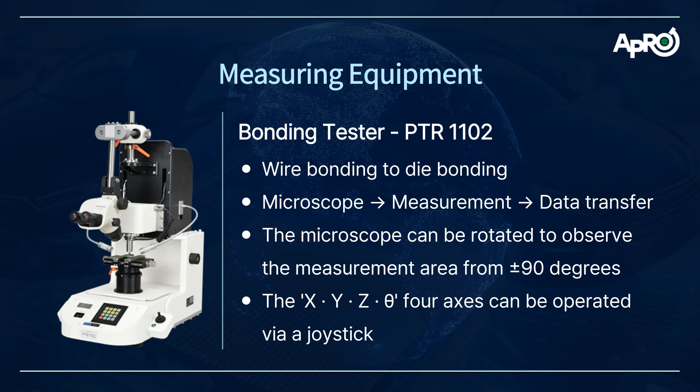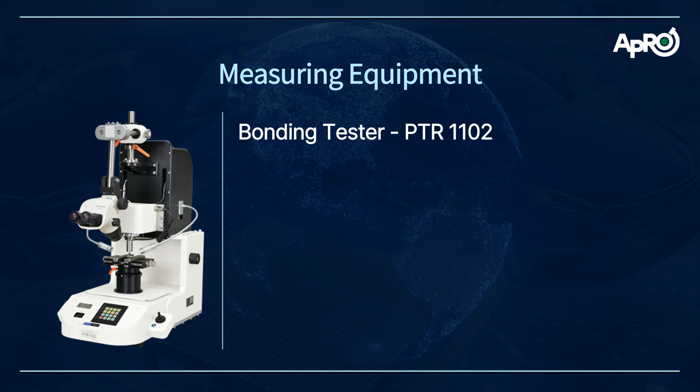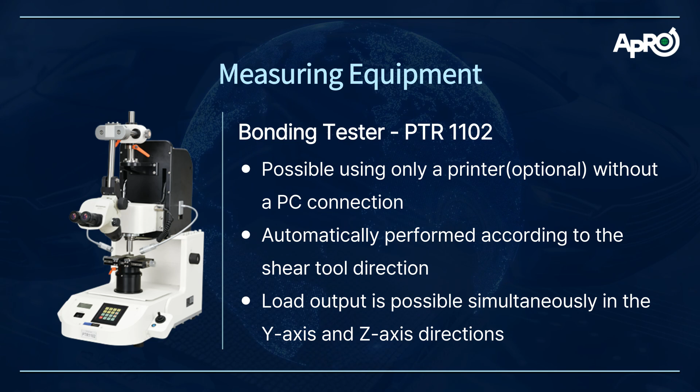The microscope can be rotated to observe the measurement area from plus or minus 90 degrees. The XYZ theta 4 axes can be operated via a joystick. Measurement is possible using only a printer without a PC connection. The shear test direction is automatically performed according to the shear tool direction. During the shear test, load output is possible simultaneously in the Y-axis and Z-axis directions.

We will talk about the types of joint strength tests this equipment can perform. Joint strength tests include pull tests, shear tests, die shear tests, and peel tests.

First, we shall introduce the pull test, specifically the one evaluating the loop strength of wire bonding. While observing through a microscope, the hook attached to the load sensor is hooked onto the wire using joystick operation. The hook is raised to break the wire, at which point the load value is measured and the break location observed.

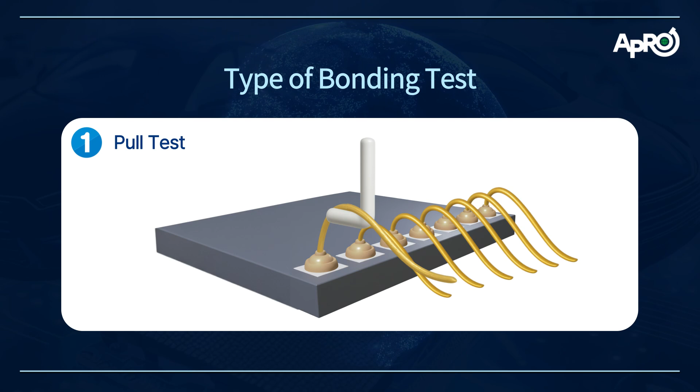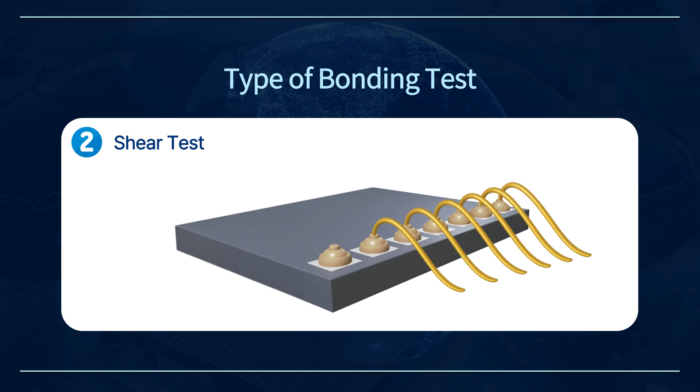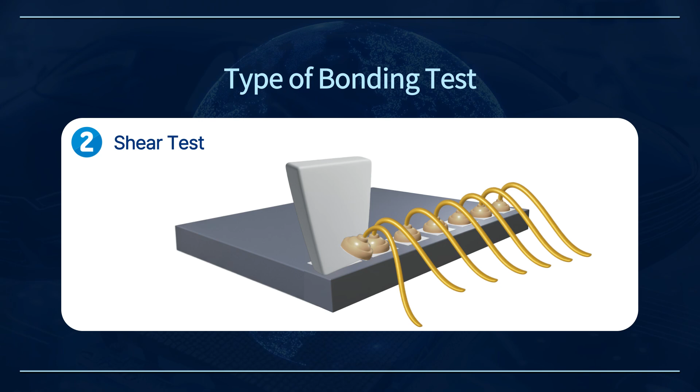Next, we introduce the shear test for evaluating the first ball in wire bonding, or the bumps in flip chip bonding. The tool mounted on the load sensor descends to the substrate surface. The device detects the substrate surface and stops the descent. The tool then ascends to a preset height above the detected substrate surface, presses against the joint, and measures the load value at failure. During measurement, it provides both Y-axis load output and Z-axis load output simultaneously. This enables the force required for failure to be analyzed as a vector.

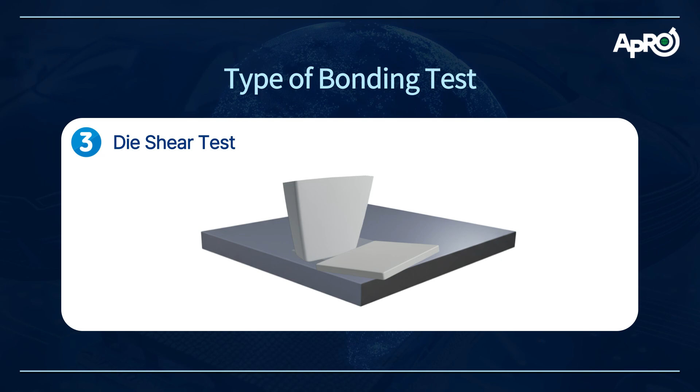Next, we introduce the die shear test for evaluating die bonding strength. The tool mounted on the load sensor descends to the substrate surface. The device detects the substrate surface and halts the descent. From the detected substrate surface, the tool ascends to a preset height, presses the joint with the tool, and measures the load value at failure.

Finally, the peel test is introduced. The wire is inserted with the tweezers open. The tweezers are raised to break the wire, and the load value at that moment is measured. Load output during the shear test is possible in both the Y-axis and Z-axis directions.

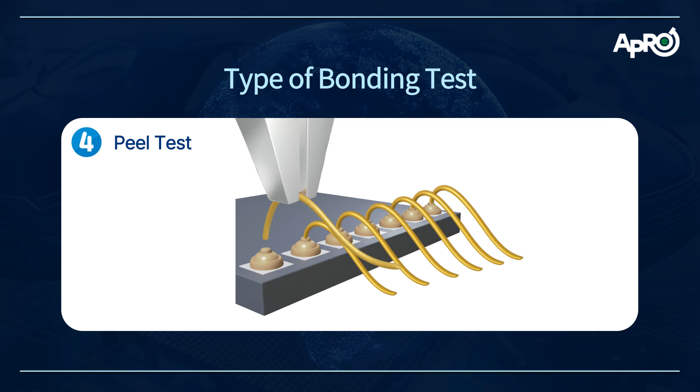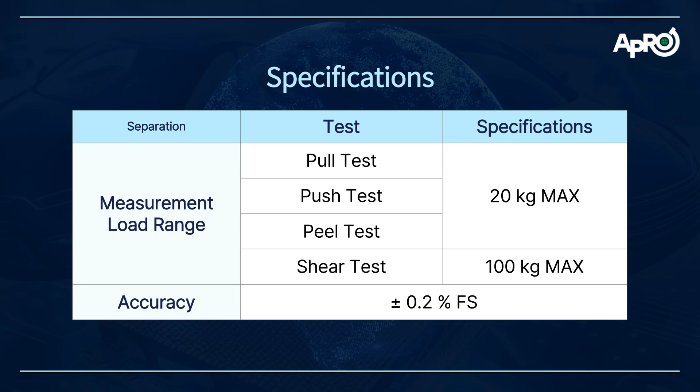The following table summarizes the specifications for each test. The maximum load measurement range is 100 kilograms for the shear test. The others can only measure up to 20 kilograms. The measurement speed range for the shear test is 0.001 to 10 millimeters per second. The others have a measurement speed range of 0.001 to 5 millimeters per second.

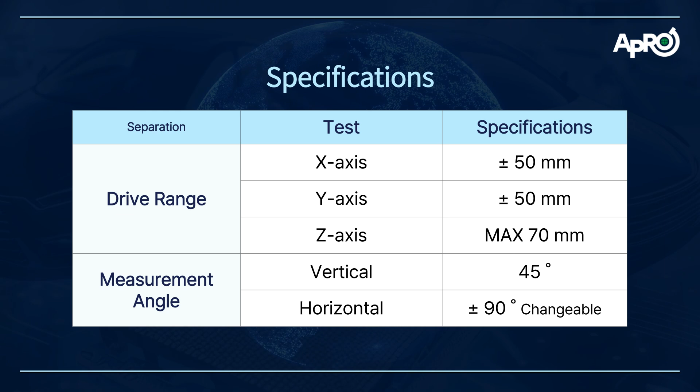The drive range differs per axis. The X and Y axes have a range of plus or minus 50 millimeters, while the Z axis can drive up to a maximum of 70 millimeters. Finally, the observation direction. The up-down direction is 45 degrees, and the left-right direction is plus or minus 90 degrees.

That concludes our talk about bonding test.